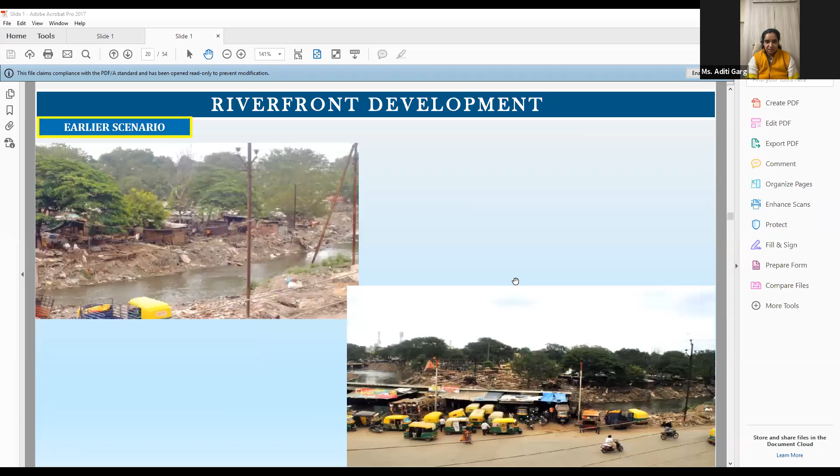At Indore Smart City, we've been looking at water and its concomitant issues through the lens of area-based development. We have undertaken a mixed approach towards our understanding of how we deal with water issues. Indore is not one of those cities that has had the problem of extreme drought, water scarcity or flooding, but at the same time, we've had to deal with our own set of issues with regard to better water management, 100% distribution of clean water, as well as linking our existing riverbeds.

What I will take you through is a brief insight into some of the work that we have done. Smart City Indore has worked on an approach called the riverside to riverfront approach, where we have tried to do a combined development of our existing 7 interlinked rivers.

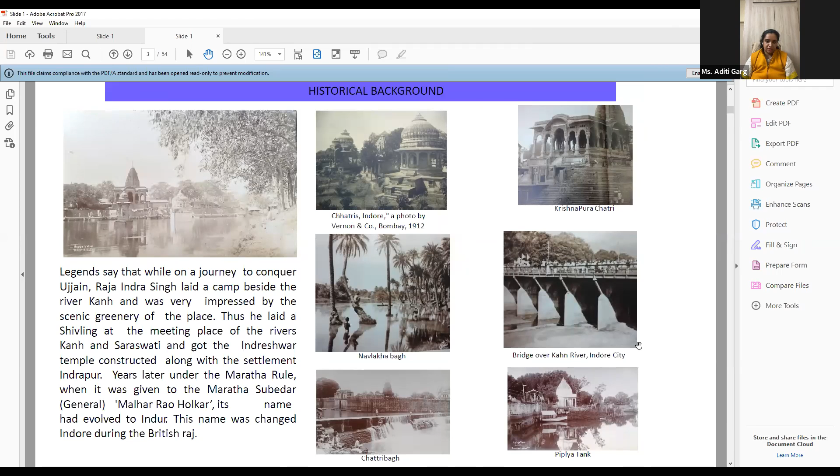The enormity of the work can be understood by the way in which we have tackled the problem of cleanliness. Indore started with trying to clean the riverbeds, we wanted to clean the riverside, and we have now moved to working towards zero waste discharge into our rivers.

The two traditional rivers that fall into the ABD area, the area-based development of Indore Smart City, are the Kanh and the Saraswati rivers. We have had an overriding focus on an interlinked approach where we envisage the regeneration and regrowth of our rivers through the overall site development of the bank.

As you can see, these are some of the old photographs of what the erstwhile Indore used to look like, and the kind of greenery and settlements it had around.

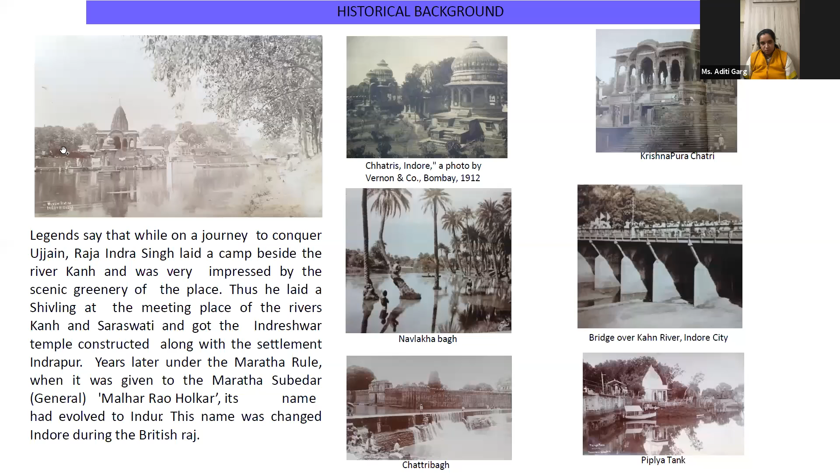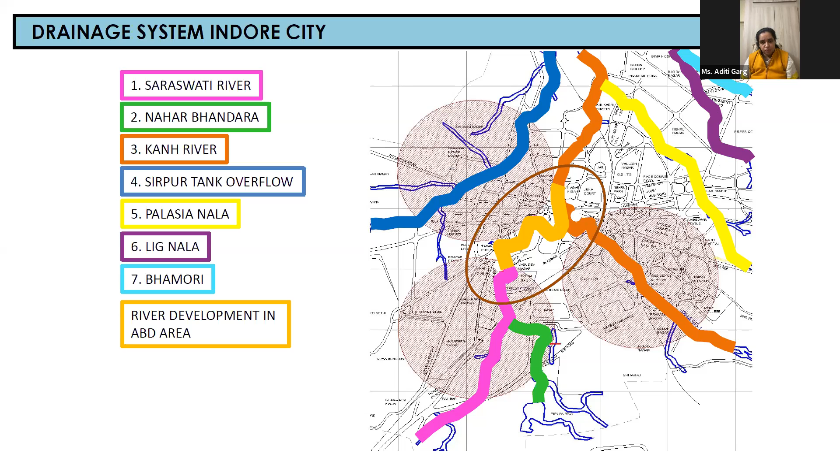So we started with the point of intersection of these rivers, and we have worked towards an overall riverfront uplift of this area. I'm happy to say that today we have zero waste discharge into these rivers. We have worked towards zero waste discharge into the rivers of entire Indore, and we have also managed to now provide clean drinking water across these settlements.

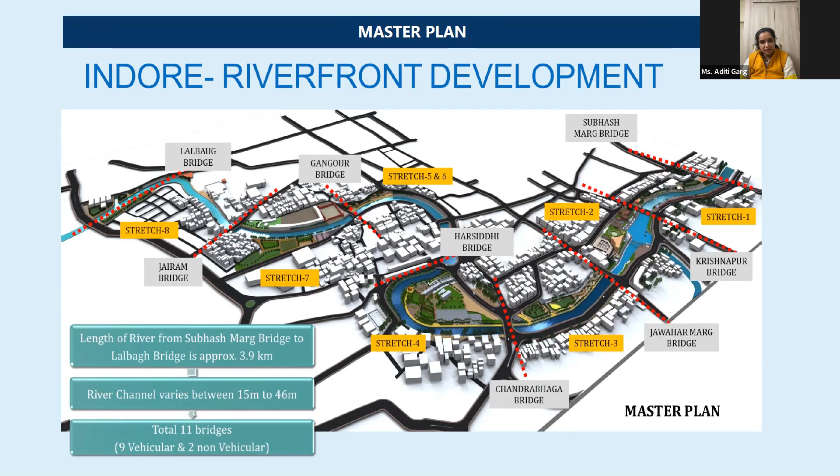The overall riverfront development of Indore has focused on how we look at this stretch of the Saraswati Kanh River. The entire stretch has been broken up into 8 segments. Each of these 8 segments has a different story to tell, a different economic and commercial as well as social outlook. We have tried to redevelop this area not only with the viewpoint of having clean rivers, but also of redeveloping the neighboring areas so that the sustainability of the river course is established.

Indore Smart City has basically undertaken an area-based approach for tackling the problem of pollution of the rivers and the dying of our existing water sources. We have tried to focus on uplifting these particular areas by linking them to the existence of the river.

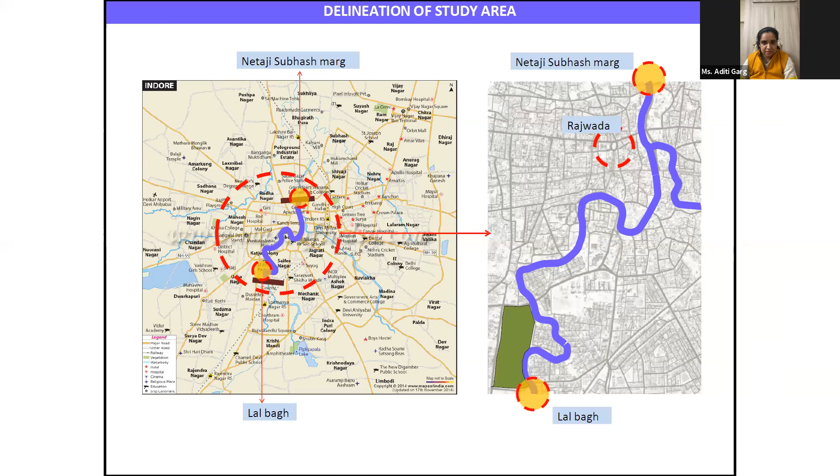As you can see, the approach and methodology has been quite focused on trying to understand how we can do a holistic development of this area. We have tried to look at the whole perspective of riverfront upliftment through 3 broad segments, the first being the environmental issue.

Obviously, the infusion of life back into the river requires us to tackle some deep-rooted environmental problems. We have also looked at the transportation network, the development of a conjugated traffic movement plan being the idea behind development of these riverfronts. The third has been the kickstarting of the socio-economic and cultural activity that we envisage can evolve around these riverfronts in order that we may be able to sustain the life of these rivers. I would like to just give an insight around the course of these rivers.

The intersection between the Saraswati and the Kanh River happens around the most congested part of Indore. This is the most populous part of Indore, and the area is entirely chock-a-block with busy streets, with commercial activity, with existing markets, and old heritage.

It is interesting how we have managed to link all of our smart city projects around the development of this river. So I can proudly say that our riverfront development is not just about the river, not just about providing a clean and clear riverside to the people, but also about provision of existing water and drainage pipelines, of providing heritage reconstruction activity around, because this area is surrounded by rich cultural heritage monuments.

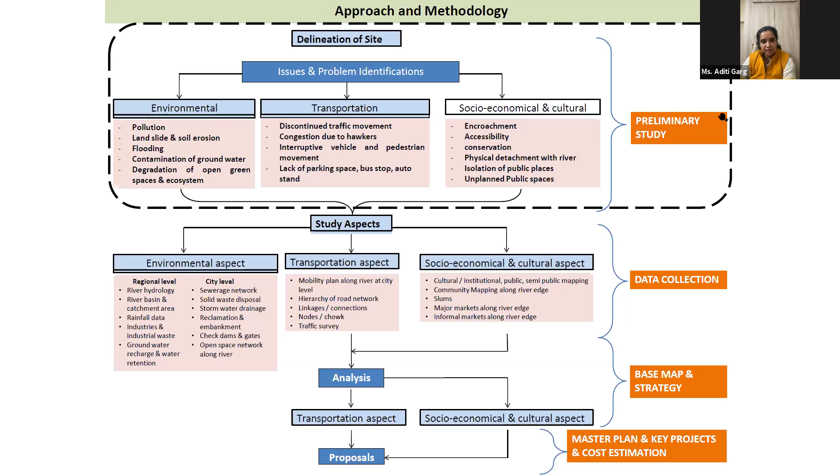So the approach that we have had towards riverfront development has been primarily local in its need, as well as very specific in its outlook. Next slide, please.

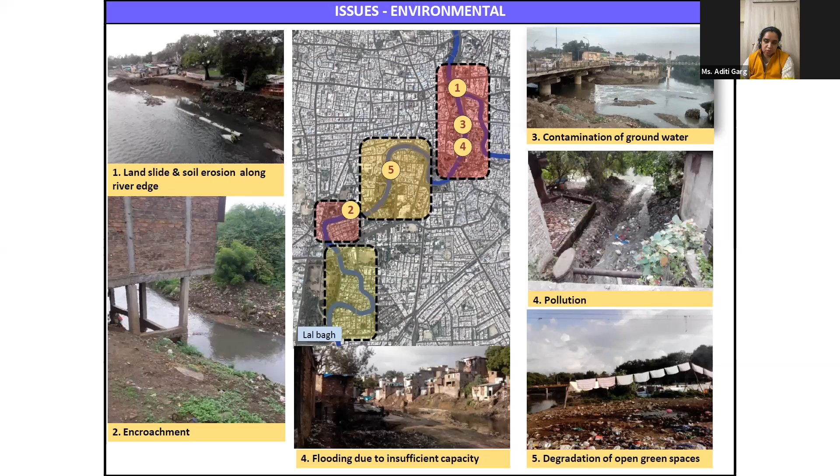Next slide, please. Another issue, as I mentioned earlier, was around the congestion.

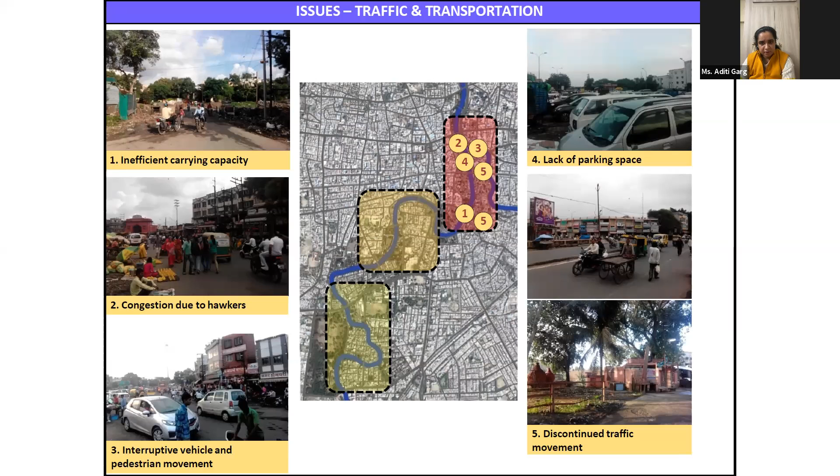As I mentioned earlier, the area is the most heavily densely populated part of Indore, and it was not just regular commercial activity seen around this area, but also disaggregated living conditions, huge congestion of unauthorized parkings, and unmanageable traffic. The problem we majorly focused on was the socio-cultural and economic aspect of this.

As you can see, we had huge unmanaged parking at public places. In fact, I remember when we had gone to undertake a heritage conservation work at one of the monuments, we found

as you can see in one of the photographs, parking inside the heritage monument. This speaks often about the degradation that we allow with our natural and cultural heritage works that we have in our cities. And this is often the reason why these monuments of natural and cultural importance are hugely neglected.

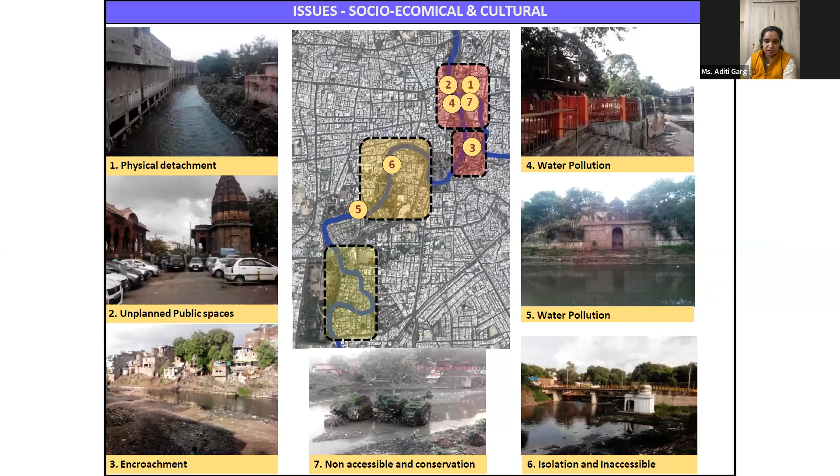Next slide, please. Some of the opportunities I just wanted to highlight briefly was that we had often envisioned that our riverside and riverfront work would involve cleaning up of the river, treatment of wastewater, and diversion of sewerage through the proper networks. But we realized it was not just that - it was a gamut of opportunities that Smart City was presented with, and we were happy to take them forward.

We ensured that we had integrated and planned movement of traffic. We had, as I mentioned before, interlinking of various projects around the riverfront development. We undertook heritage conservation projects. We undertook road development projects.

And at the same time, I think we realized that decongesting or restoring our natural river heritage is very closely linked to improvement and upliftment of the living conditions of the people. Next slide, please.

As I mentioned before, some of the challenges I have mentioned here. Sewerage outfall into the river has been a huge challenge for many cities, and this is one of the reasons which leads to contamination and poor living conditions. I'm happy to note that now Indore is moving towards 100% stoppage and zero outfall of sewerage into our rivers. So that is one achievement that we have managed to pocket.

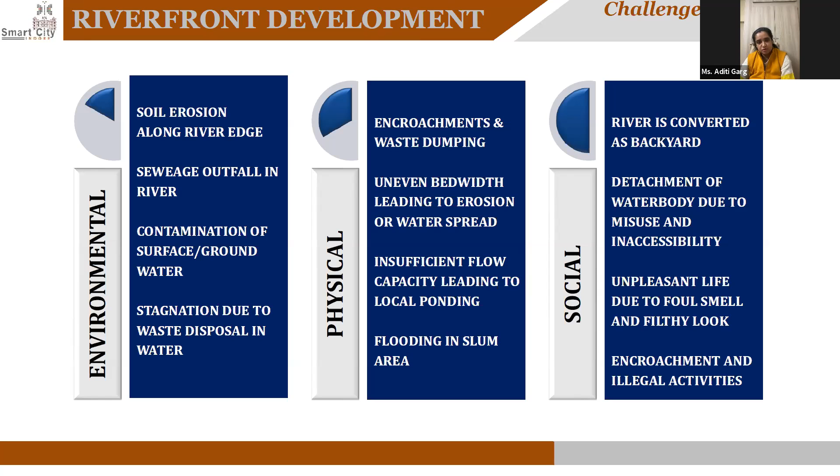why we have neglected these areas as an overall development, and we have failed to incorporate them as part of our vision to develop the city. So we were happy that we were able to target these issues. Although they seem to be challenges, we were happy to have converted them into opportunities. Next slide, please.

As I mentioned before, the riverfront development was undertaken over 8 stretches. We have been able to complete some of them, and the total cost of the entire length of 3.2 kilometers has been approximately 60 crores. The biggest challenge, I think, next slide, please.

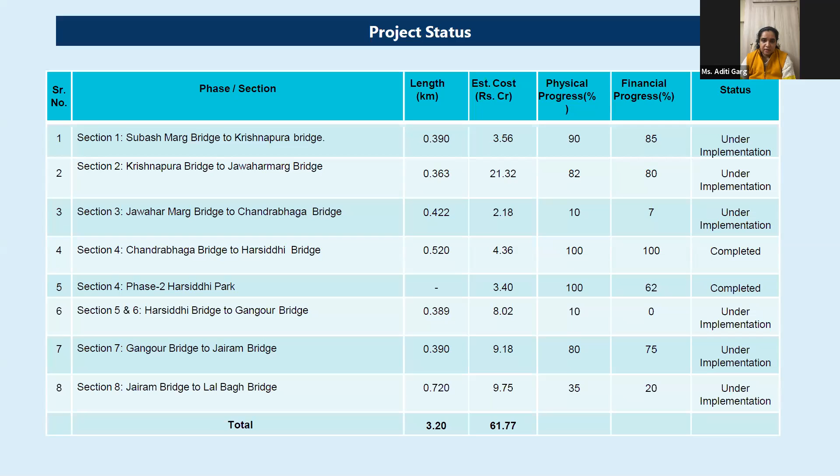The biggest challenge with undertaking the kind of riverfront development that we had envisaged was not just the natural and cultural heritage, but also the relinking of the economy of the people. This particular slide talks about one stretch of development, which is the CP Shekhar Nagar. I remember when this redevelopment was undertaken, there was a huge activity of resettlement of people, because this stretch actually had 3 to 4 slums.

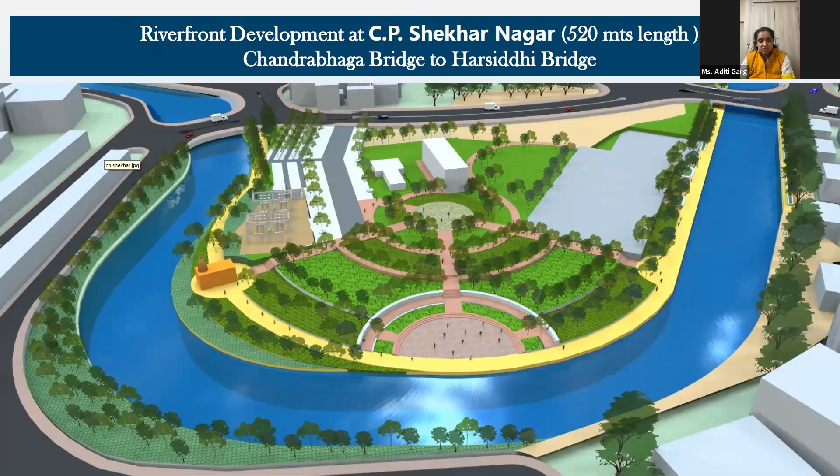All of those slums were shifted and moved to proper housing conditions, and this entire area was redeveloped as open public space. Although this area had a huge problem of congestion, of traffic, of non-availability of open public space, we were happy to be able to have converted this into the kind of riverfront that you see in these photographs.

One of the biggest and most challenging parts was development of the toe wall, the stone pitching, and development of the road. We noted that once the area was redeveloped, traffic was also diverted from the inner part of the city, and the city traffic movement breathed new life into the movement of people.

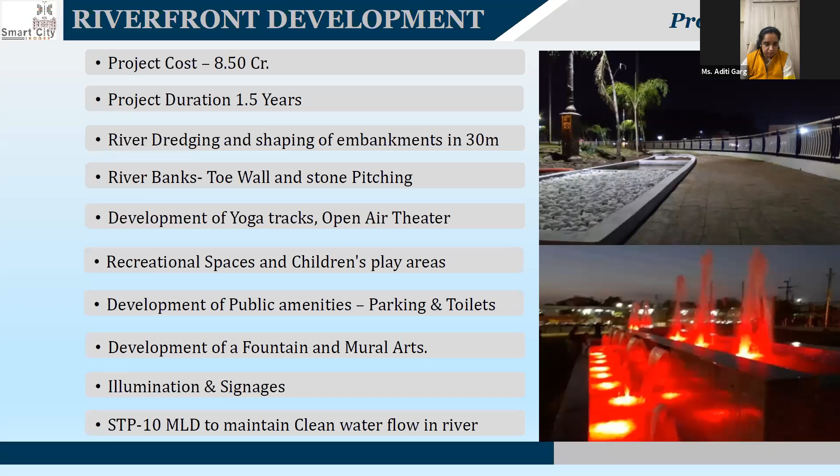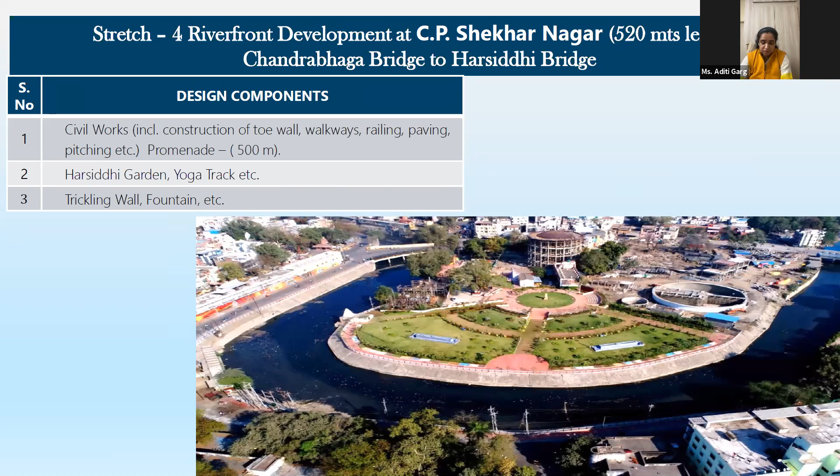I'll just quickly run through some of these phases. This is what the riverfront looks like today. As you can see, an STP is also coming up in the area. The water has been cleaned up, and the entire area has had a facelift and is now open to public use. The market that used to be conducted here continues, and I'm happy to note that people who earlier used to visit the market are now able to make use of the adjoining amenities we've been able to provide.

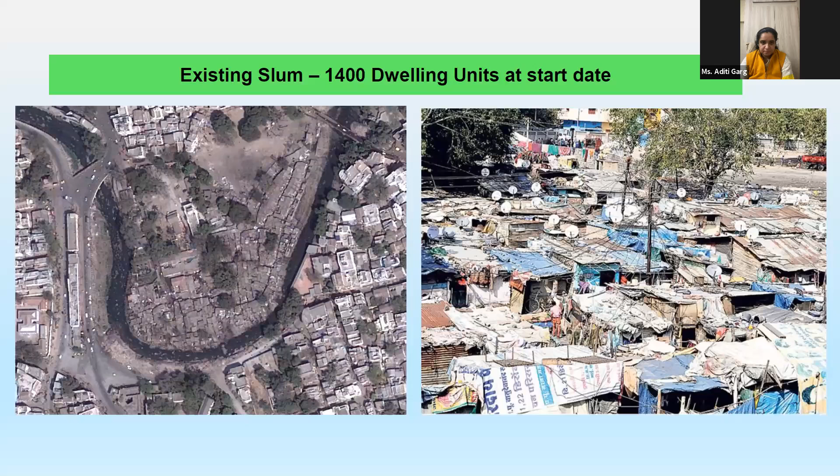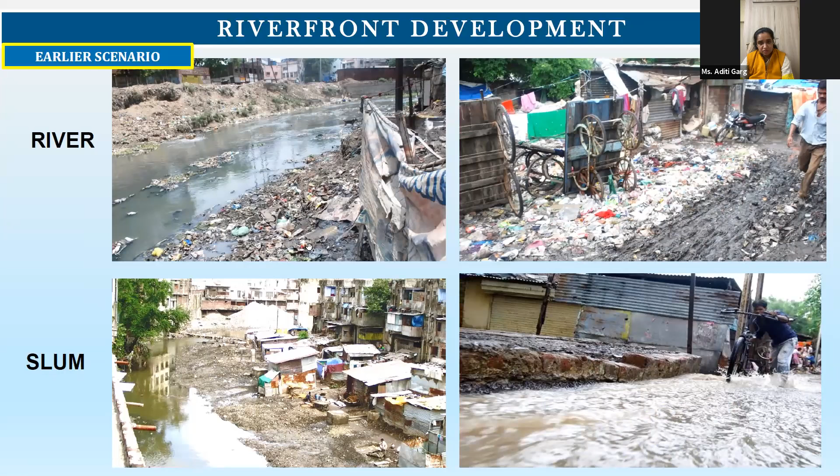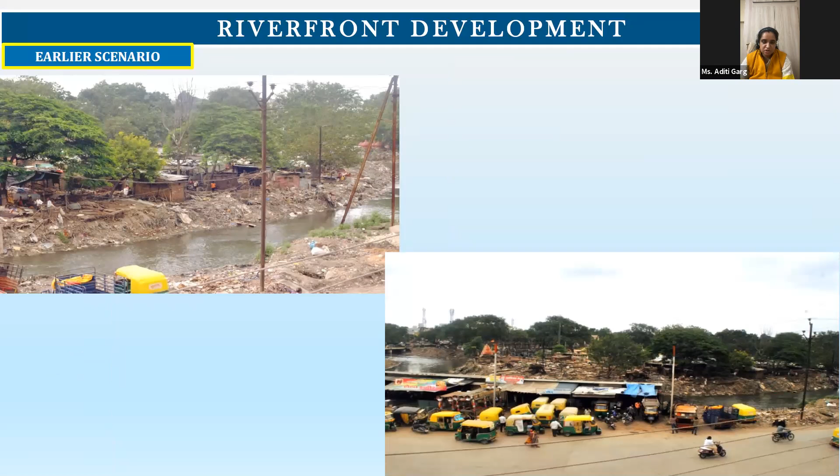The rehabilitation efforts that were undertaken centered around providing the 1,400 families a move from the slum and squatter living conditions into proper constructed housing. The schemes we depended upon were Government of India schemes around housing, where they were resettled and removed, and public transport facility was also provided to the rehabilitated families.

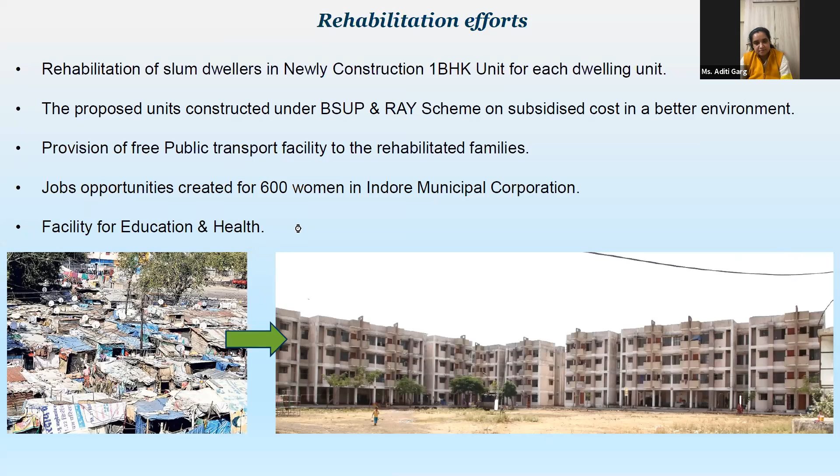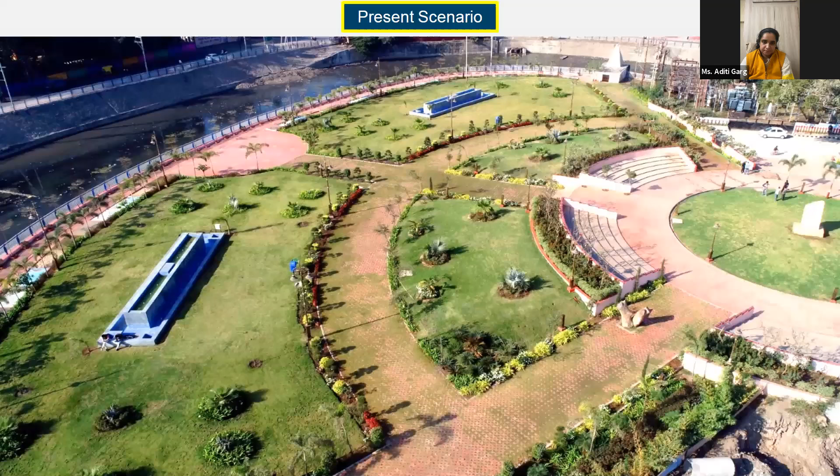This is the transformation, as you can see, from the earlier photographs onto the present. This is exactly what it looks like even today. This is what it looks like during our famous monsoons.

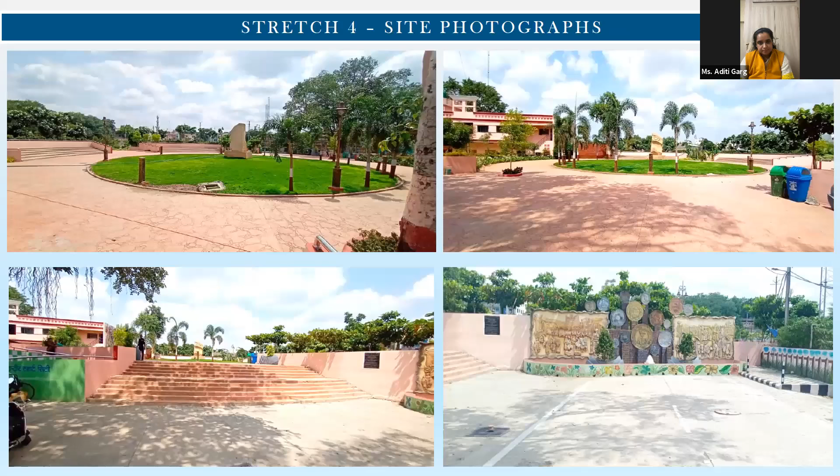These are some of the photographs of the various stretches we have been working upon. As you can see, we've now had a dedicated water pipeline and supply of drinking water to all the neighboring areas. This is the redevelopment front of the riverside.

The parks and open spaces have now been made accessible to all, and they're all abilities-accessible as well. So these are often used extensively by the local populace.

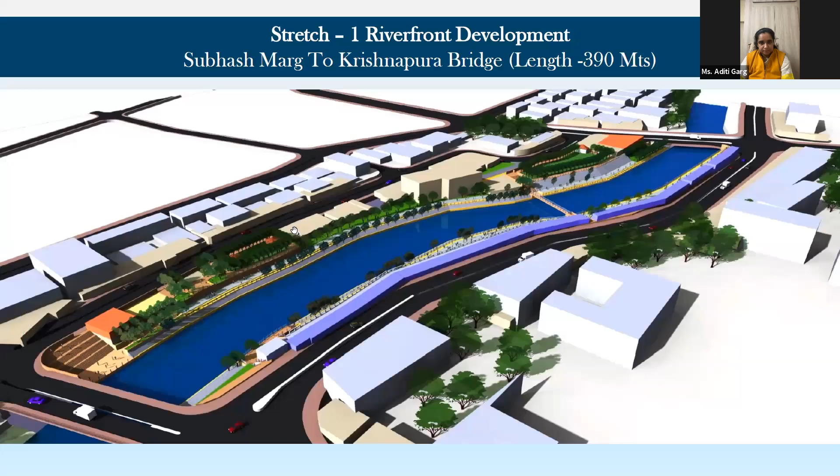As we move forward, I'll just cover some of the other stretches that we have worked on briefly, as I realize I'm running out of time. We'll quickly run through these photographs, and I'll give a background of the overall riverfront development.

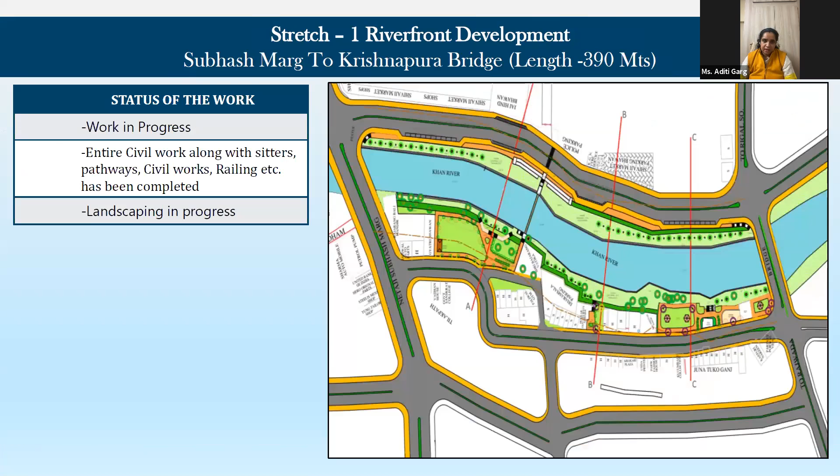Each of these stretches has had a different story to tell. Most of these stretches are under construction; some of them have already been completed. As you can see on this particular stretch, we have undertaken extensive landscaping activity as well.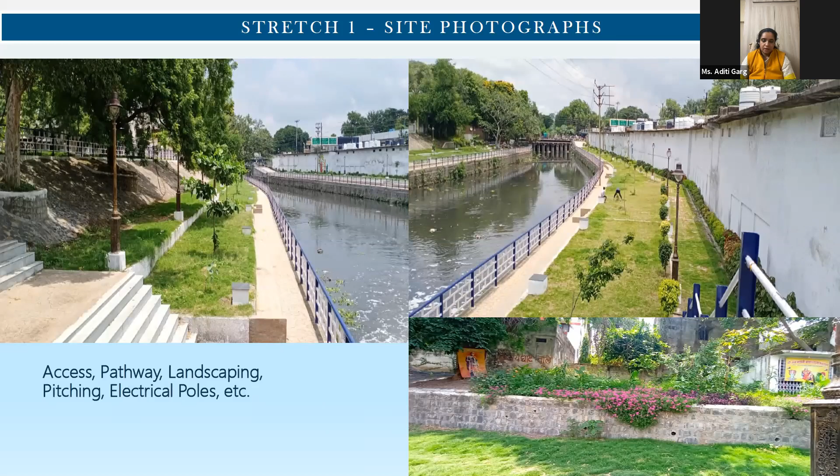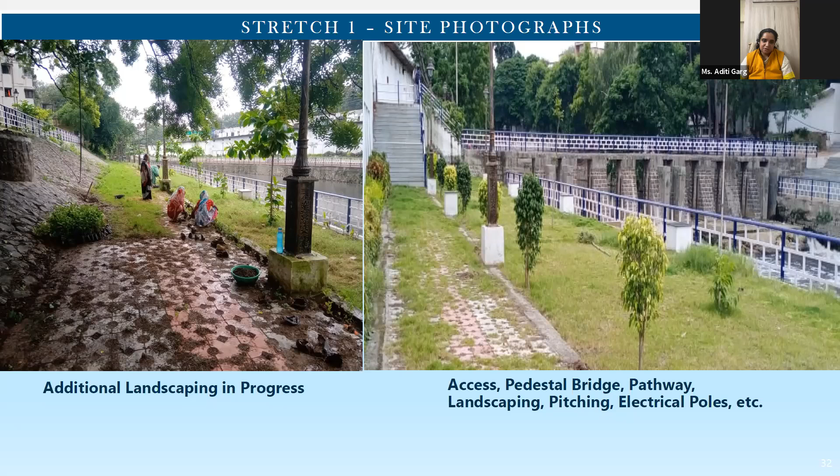A lot of the work that has happened around riverfront and water conservation has been associated with our cleanliness drive, for which Indore as a city is quite well known. I'm happy to note that we have had extensive support from the local population, and they have come forward and helped us. The same people who had been resettled have actually come back and started using these amenities that we have provided.

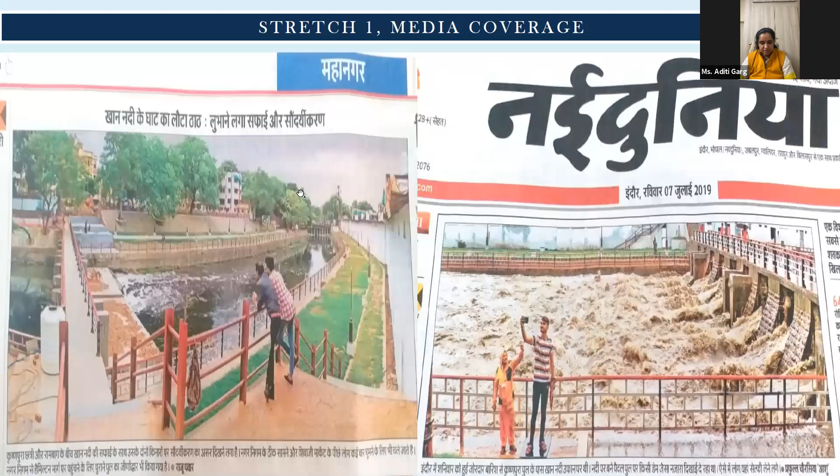This is some of the media coverage that we had during the monsoons.

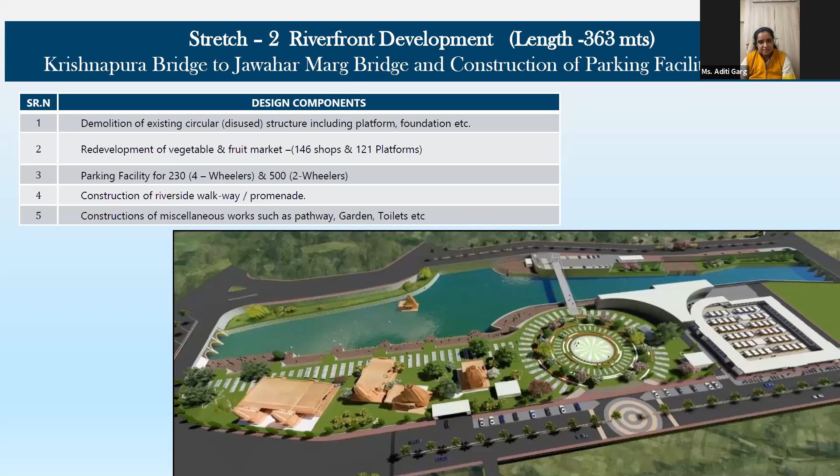These are photographs of the riverfront stretch adjoining the previous one - this is stretch 2. A lot of development and redevelopment has happened along these stretches, and I'm very happy to note that some of these stretches have actually transformed the look of the city for the long term. Some of the designs we've incorporated have also had innovative solutions - for example, this stretch has commercial as well as public space neighboring each other. This has been an experiment that's been hugely successful in India and in Indore, associated with the redevelopment work we've done with the river.

This is some of the resettlement of the commercial complex. The parking and the shops have been provided in order to undertake the commercial activity that was existing in this area. So we did not want to harm the economic activity that was going on. And we hoped that we could convert it into an ongoing commercial center.

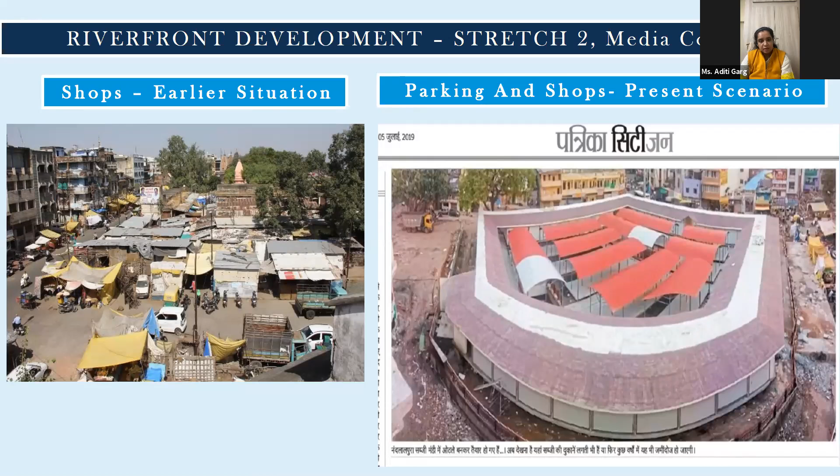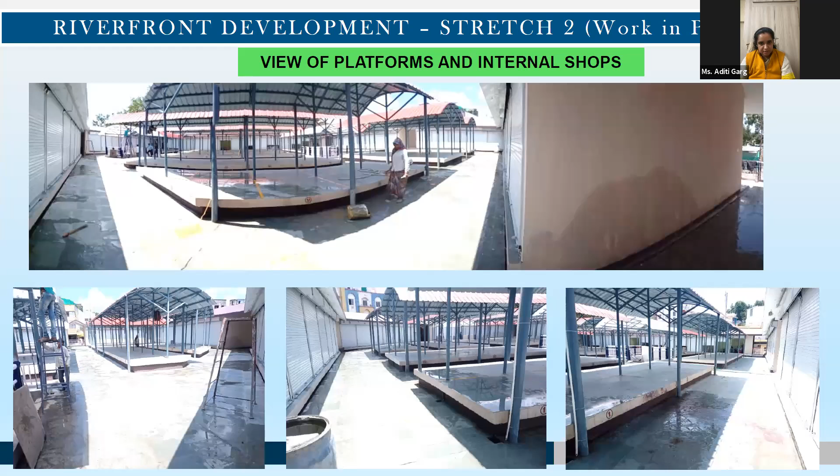These are some of the areas that we have now developed, and I'll just keep you going through these photographs because, as they say, pictures can tell a story in lesser words. So I'd let the pictures speak for themselves.

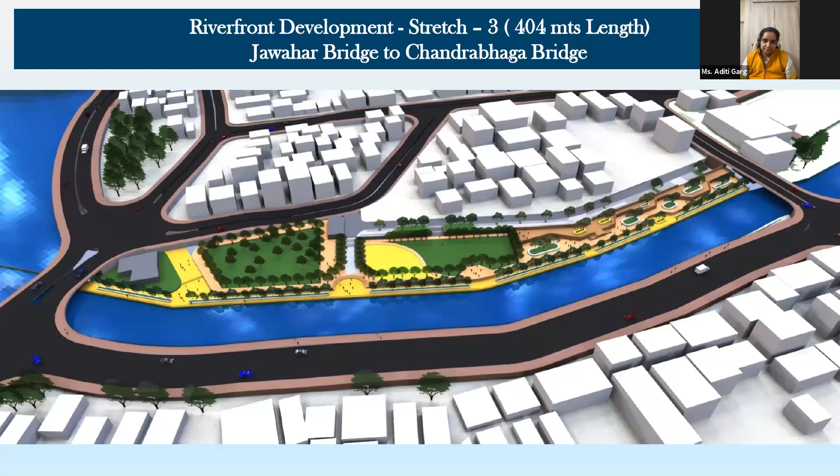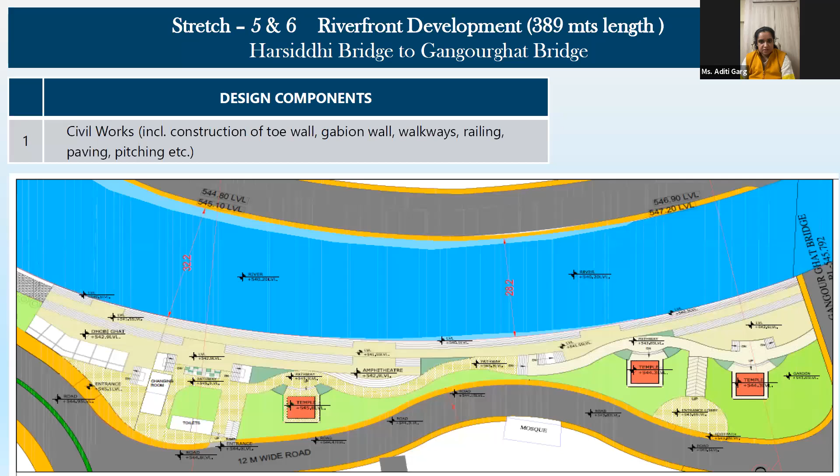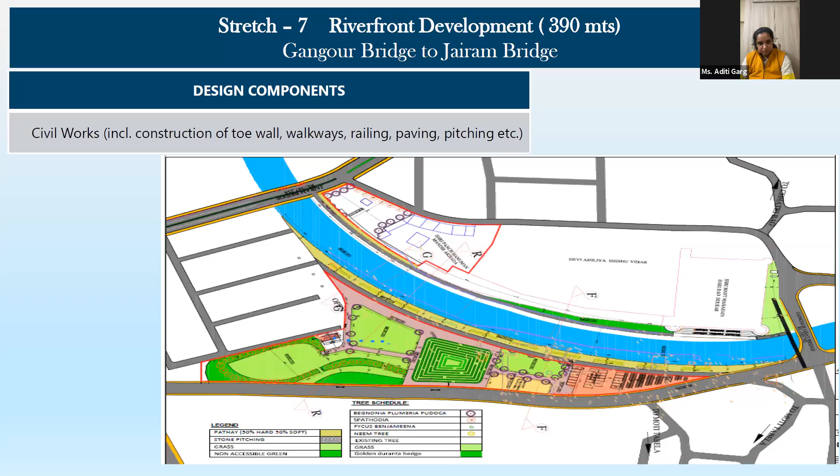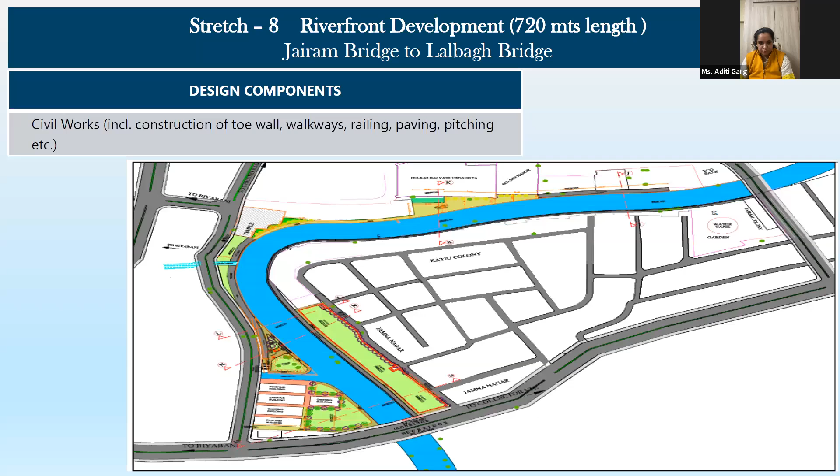These are some of the photographs of the ongoing works along the riverfront that we are now undergoing with the design and detailed components of each stretch. And these are some of the site photographs. As you can see, the entire riverside is now undergoing a transformation slowly but surely, and the access to the area has improved with regard to all kinds of amenities and activities.

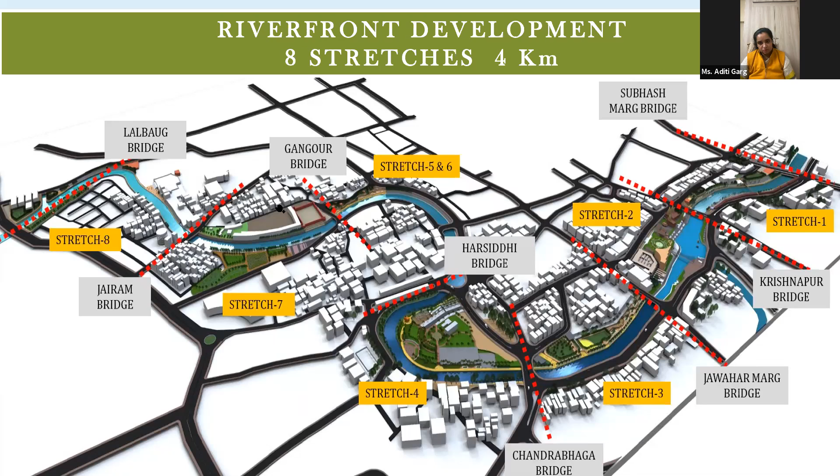At the end of this, I just wanted to add that our experience, Indore Smart Cities' experience with the riverfront development, has been unique in a manner that we have tried to link many activities together. We have tried to undertake different segments of people and link them to the existence of the river, and we have tried to ensure that they can coexist with the rivers that intersect Indore, and they can continue with life as they always did, in better living conditions, in better working conditions, and a whole comfortable environment.

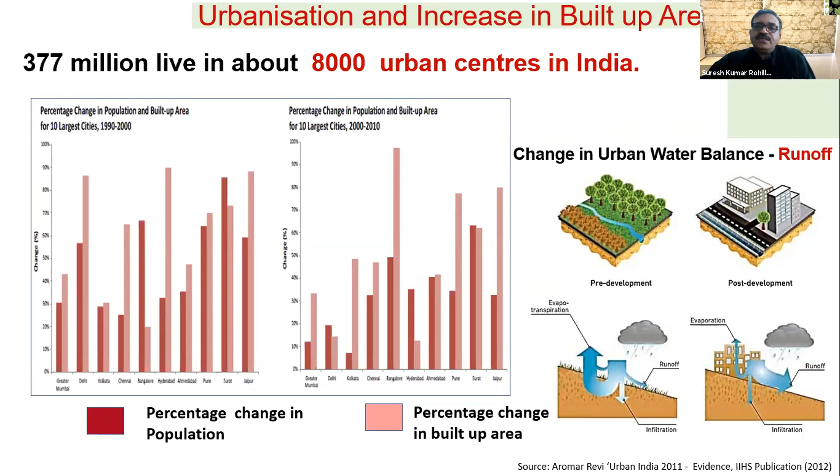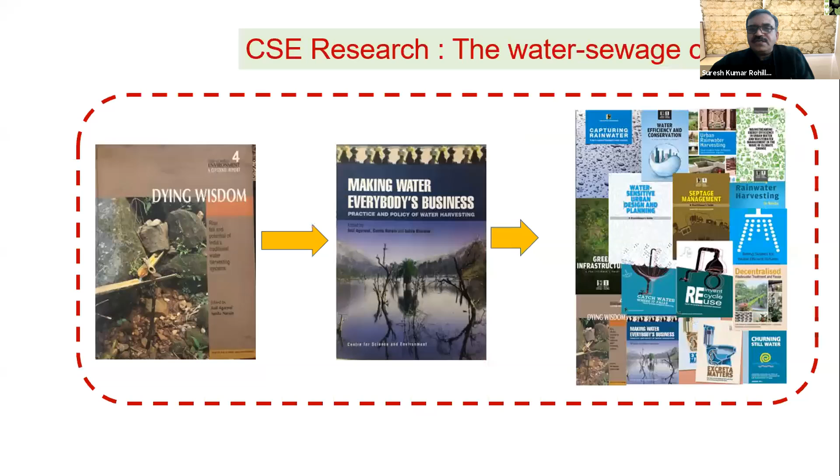This study has been done across 72 cities. We have also historically mapped what has gone wrong, how we used to manage water historically, and how we manage it today, which is more institutions and utilities responsible, with no role for communities.

What has resulted today is two scenarios: parts of cities or many cities struggling to meet the water supply demand gap, and huge exploitation of groundwater in the name of development. 40% of India is falling under the dark zone. That is the emerging water scenario, based on assessments by the Groundwater Board, a government agency.

On the other side, we see a huge increase in the number of flooding hotspots. Every big city - Pune, Chennai, Gurgaon, Hyderabad this year - you name it, we are having it. This is increasing every year, and people just pass it off saying this was one of the highest rainfall years.

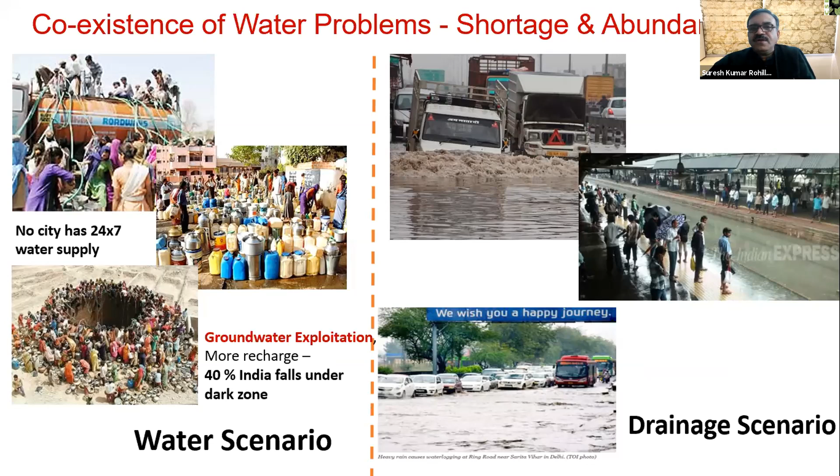But are cities ready to adapt? That is the big question. What model will we follow? We did quick research on urban centers across the country and found that in the last 5 years, urban flooding incidences have increased. More than 50% of major urban centers in India have reported flooding, which is one of the major issues.

If we look at groundwater status - normally all city plans are made for bringing water from far away. However, when there's a demand-supply gap, cities extract groundwater to meet it. Individuals have coping strategies; they meet their unmet demand from municipal sources by extracting groundwater.

CSE has been working in this area, and we have found that the role of community has been totally destroyed in water management in cities. They have been reduced to just subscribers, and India's rich hydrological traditions have been lost to a mindset of flush and forget.

On one side, we have a paradigm where we want to bring water from far away. We neglect local resources like ponds, lakes, and water bodies. We only talk about end-of-pipe solutions like sewage treatment plants, but we don't talk about decentralized solutions.

What happens many times is that centralized sewage treatment plants, after spending crores of rupees, end up disposing treated water back into the river - which is basically of no use because half the city isn't covered by the sewer network, and sewage is flowing in. It's back to square one: you've spent crores of rupees but mixed the treated water with untreated sewage that's flowing.

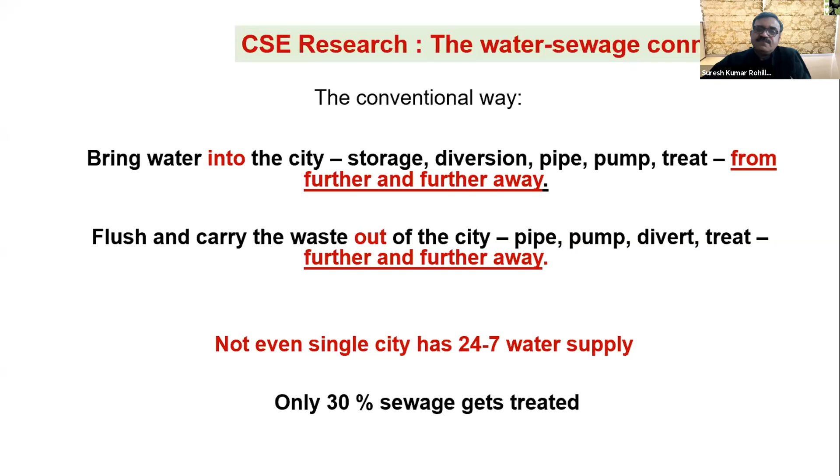Today, the biggest problem is that, with maybe one or two small case examples of 24/7 water supply, out of these 8,000 urban centers, there is hardly any city which can say that they have 24/7 water supply. And only today in India, 30% of the sewage gets treated.

Of this total treatment capacity, 50% exists only in Delhi and Mumbai. Given this difference and the change required, CSE strongly feels there is a challenge of innovative policy and practice at the scale things have to change. There are interesting projects like smart cities and Amrut, but they cater to only 500 out of the 8,000 urban centers in the country. So across the country, there is a big requirement for change.

There is a natural catchment extensively undergoing change with huge programs like affordable housing and infrastructure projects. There is a hydrological impact of this urbanization, and there is a need for relooking at this.

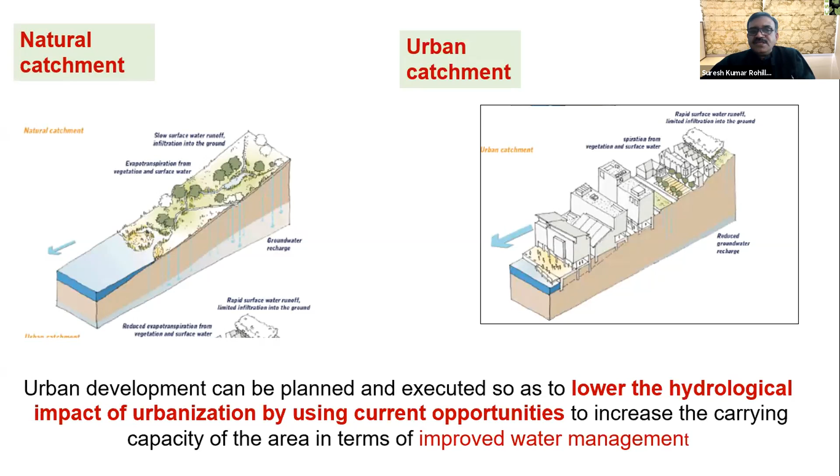Basically, instead of first neglecting local resources and then bringing water from outside, we should explore possibilities within cities: how we can delay the monsoon runoff, store as much as possible wherever possible within the city, and only then, once we have explored all the opportunities, let the runoff go into the drain or the river. This is the new model we are trying to promote, so that we can address both water management, water mismanagement, and the flooding issue.

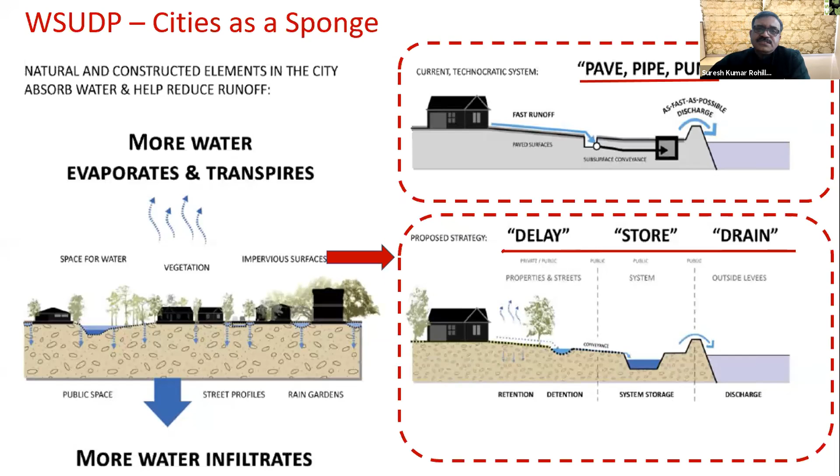This is the paradigm we have been trying to push for change, and we strongly believe this can only happen if we change the current paradigm where we think centralized systems will be able to provide all the service delivery.

Unfortunately, even in big cities like Delhi and Mumbai, 25 to 30%, or as high as 50% of the population lives in unplanned areas, and they remain outside the purview of service levels or the high targets that are set.

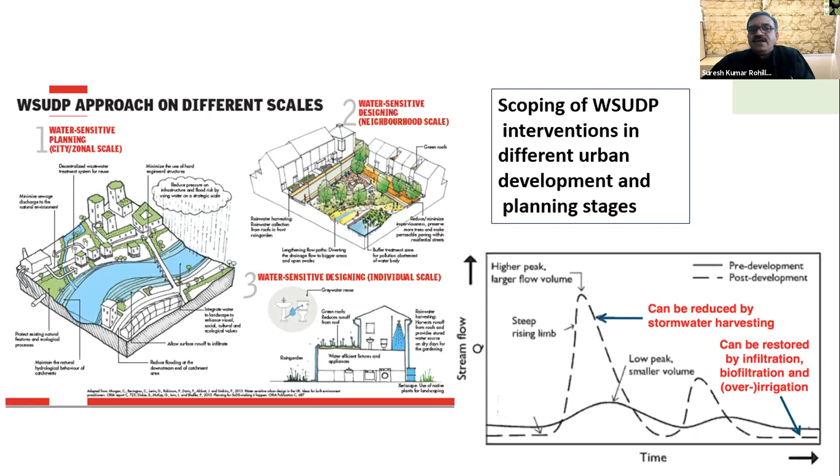Do we need to follow the same paradigm the developed world followed, where first we become a water supply city, then a sewer city, then a drain city, and then we have lost all the opportunities? We've built over all the open areas, catchments, lakes and water bodies, and only then start talking about becoming a water sensitive city. Many of our cities in India still have that opportunity, they are still growing, so they need to be more water sensitive.

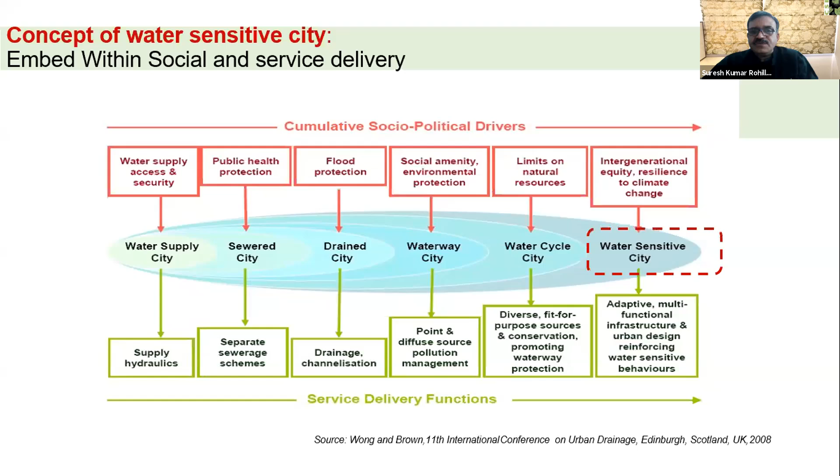That's the current paradigm CSE is pushing for. We explored the master plans of around 60 to 70 cities in India, and found that without changing the building norms and standards within existing planning norms, there are open spaces as high as 74 to 79% available for innovative practice and policy.

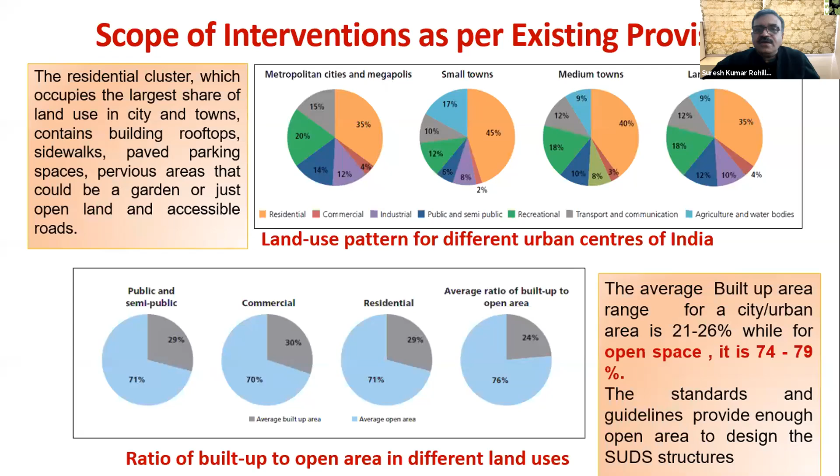These pie charts show the extent of open spaces available in small and medium towns as well as metropolis cities. Within residential neighborhoods there are extensive spaces, but they are neglected, with focus only on centralized sources of bringing water or building centralized sewage treatment plants.

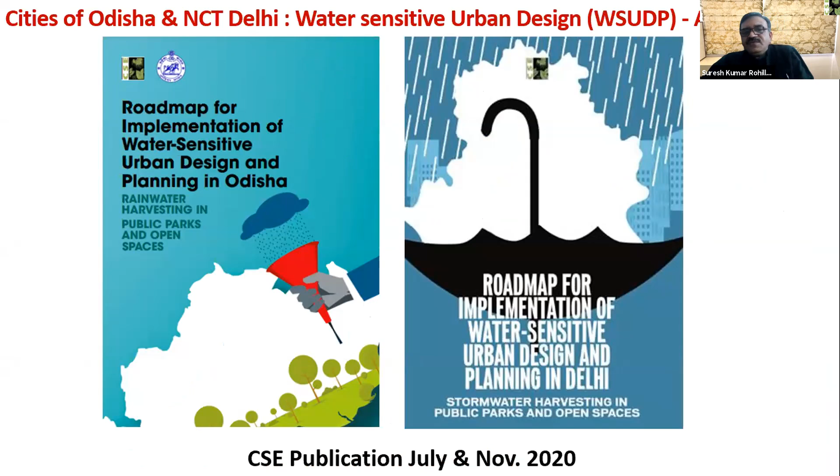We have developed some solutions, and I will present two case studies here: one from Bhubaneswar, Odisha, which is also a smart city, and Delhi, which is also one of the smart cities. We have suggested to the government that there could be additional possibilities of exploring intervention areas.

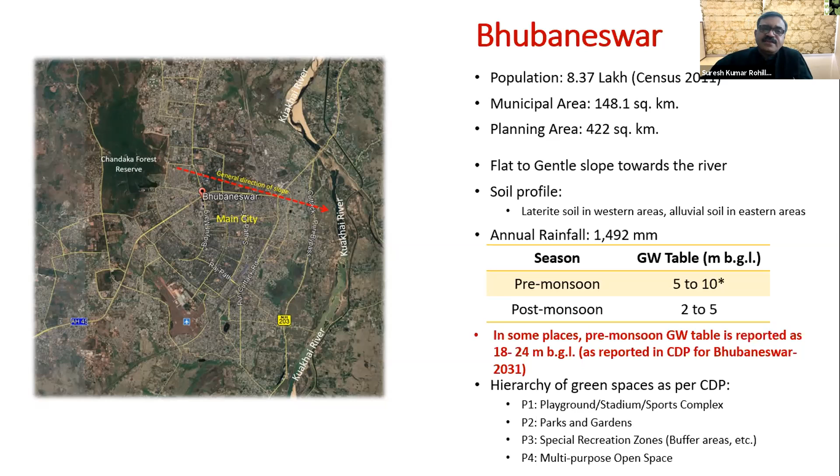In Bhubaneswar, we have identified a few parks, and we've told the Housing and Urban Development Department that there is extensive potential in utilizing existing spaces planned as per the master plan, such as playgrounds, stadiums, sports complexes, parks, garden areas and multi-purpose open spaces. These are terms every planner uses in area development, spaces which could be utilized for harvesting stormwater.

And there are several structures we have discussed which are not cement and brick, but structures which will retain the flow runoff in the form of swales, bioretention areas, detention areas, which will also engage the communities, increase the aesthetic value, improve living conditions, and add value to public health requirements of today.

We find that rainwater harvesting or stormwater harvesting structures in these parks use only 1 to 3% of the total area. However, you could harness 43 million liters of water in these three parks alone. Assuming 15 neighborhood parks, a total of 59 million liters of water can be harvested annually. You can imagine how much reduction in flooding events would happen with this water not going to the roads and becoming hotspots, as well as contributing to total water augmentation in a city.

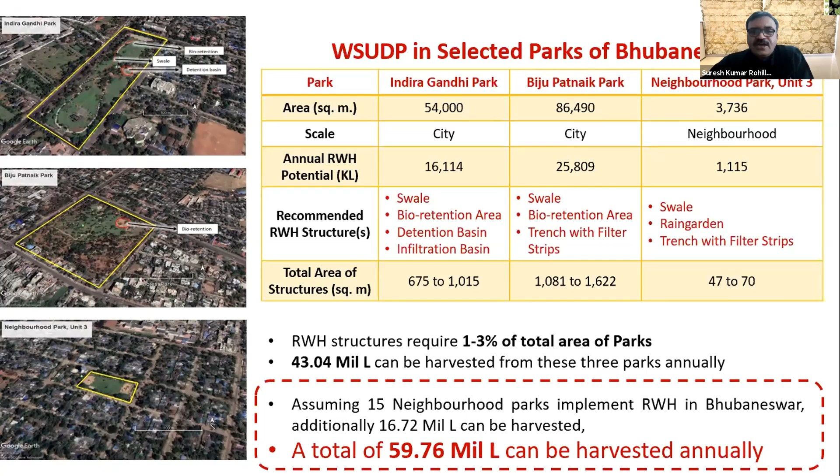So this is one case. Now I'll move on - we have done this for Cuttack as well as other cities like Rourkela. These kinds of detailed area development studies have been done.

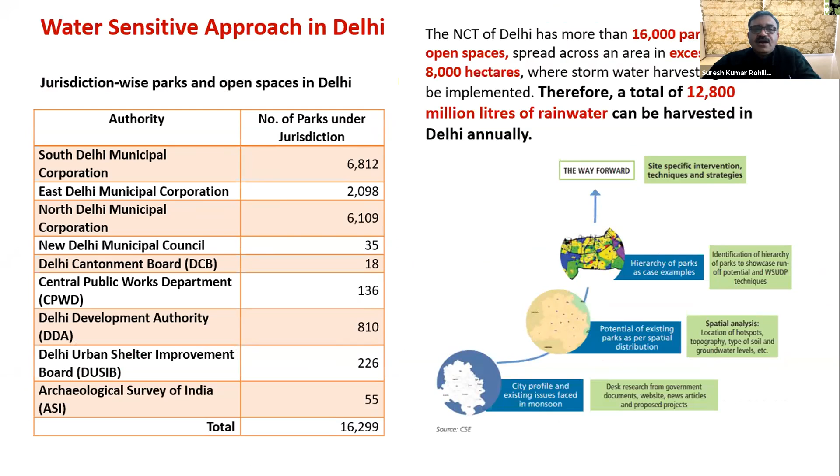Now I would come to Delhi. Recently, a report was submitted to NGT that there are 16,000 parks and open spaces in Delhi, covering 8,000 hectares. Delhi is a national capital and smart city, and there is potential for 12,800 million liters of rainwater which could be harvested annually. However, it goes down to the roads and creates flooding hotspots.

So we have done detailed mapping of these parks within South Delhi, North Delhi, and East Delhi, and examined three parks similar to what we did in Bhubaneswar: Saket District Park in South Delhi, a park along the Ring Road where flooding happens, and a neighborhood park around Greater Kailash. These are highly built-up areas with a mix of planned and unplanned development. We found that 1 to 2%, or maximum 3%, of the total area is utilized in these three parks.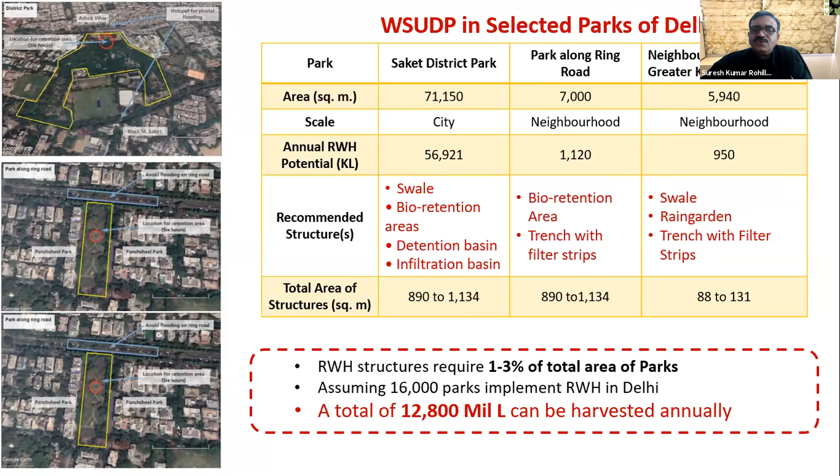And you could actually harvest 12,800 million liters of water annually, addressing both flooding and water management issues. You could improve the paradigm of how water is managed, creating decentralized water management. You could also engage with communities and add value to public health systems, which is important today.

We should not just look at green or blue areas as a landscape issue, but look at blue-green spaces as infrastructure, and make water everybody's business, which Aditi ji also talked about. Riverfronts also connect with people. We should try to reduce built form while creating more natural spaces, enhance water literacy, and have strict legislation to follow this.

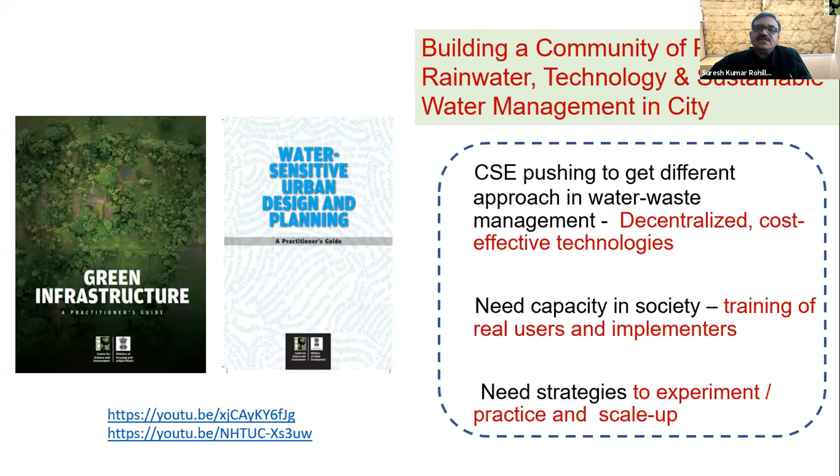So for the government of India, we have developed two guidelines, basically on water sensitive design and planning. These were supported by the government, and they are mainstreaming this. Odisha government is the first state government to issue guidelines on mainstreaming water sensitive design and planning and green infrastructure. With this, I would end my presentation, and thank you very much for giving me this opportunity.

Thank you. That was very interesting. I liked hearing both the breadth of urban spaces in India and some of the examples from other cities, so that was very, very interesting.